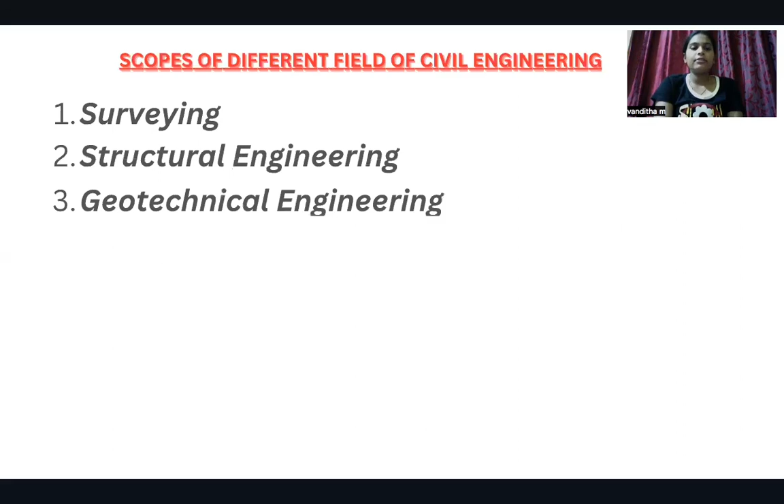So next, we'll discuss about scopes of different fields of civil engineering. Totally, there are 9 scopes of different fields of civil engineering, which include surveying, structural engineering, geotechnical engineering, hydraulics and water resources, transportation engineering, environmental engineering, construction planning and project management, earthquake engineering, remote sensing, and GIS.

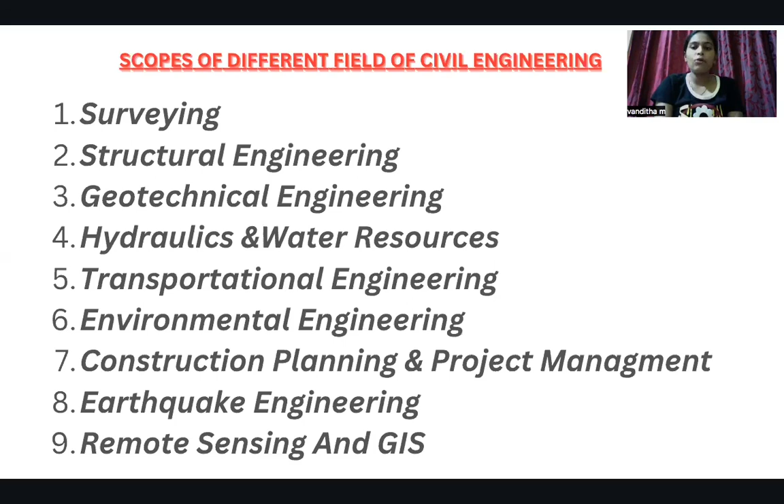So first, what is surveying? It is the science and art of map making. It mainly deals with various types of measurements and plotting of maps. Unless maps are drawn, no development work and construction can be undertaken. So surveying is a very important part in the construction of any structure. The common instruments used for surveying are chain, tape, compass, GPS, drones, etc.

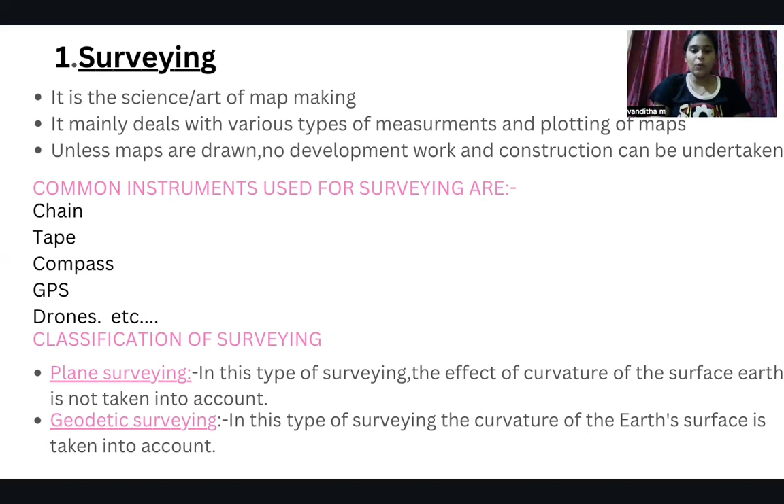The classification of surveying is mainly done into 2 types: the first is plane surveying, followed by geodetic surveying. In plane surveying, the effect of the curvature of the Earth's surface is not taken into account, whereas in geodetic surveying, the curvature of the Earth's surface is taken into account. So next, we have the instruments that are used for surveying.

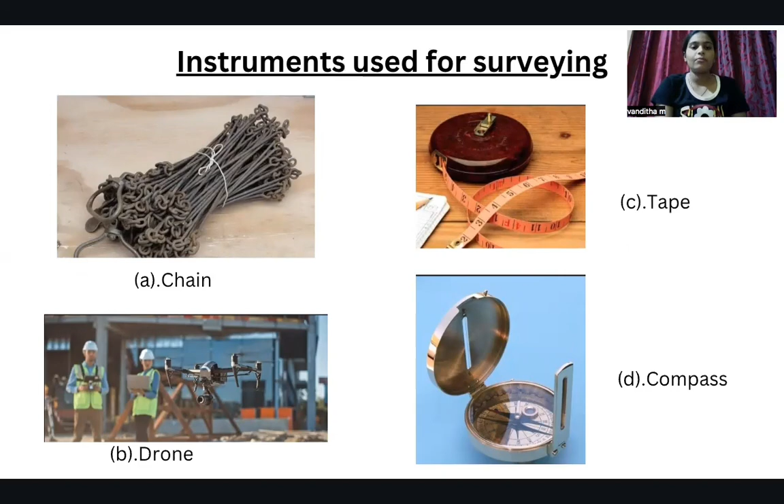Next, we'll move on to the building materials. What is a building material and what are the materials used for construction of a building? The materials used for construction of any structure are called building materials. As we all know, shelter is the basic need of every human being. In order to get a good shelter, the instruments or the type of materials used for construction need to be of a very good quality.

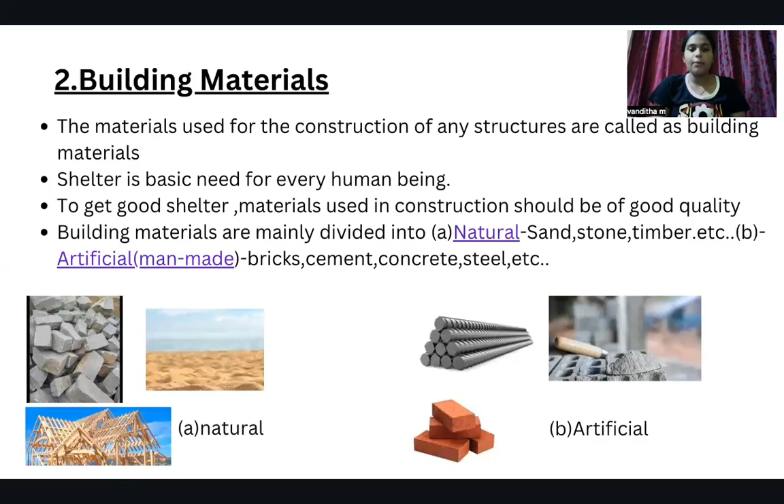The building materials are mainly divided into natural and artificial. Man made things come under the artificial type. The natural includes sand, stone, timber, etc. Whereas the man made, which is artificial, includes bricks, cement, concrete, steel, etc.

Next, we have geotechnical engineering. What is geotechnical engineering? It mainly deals with the study of soil, its types, and their properties. Soil properties may change from place to place, depth to depth, and even sometimes from season to season. Proper geotechnical engineering is essential for a safe and secure structure.

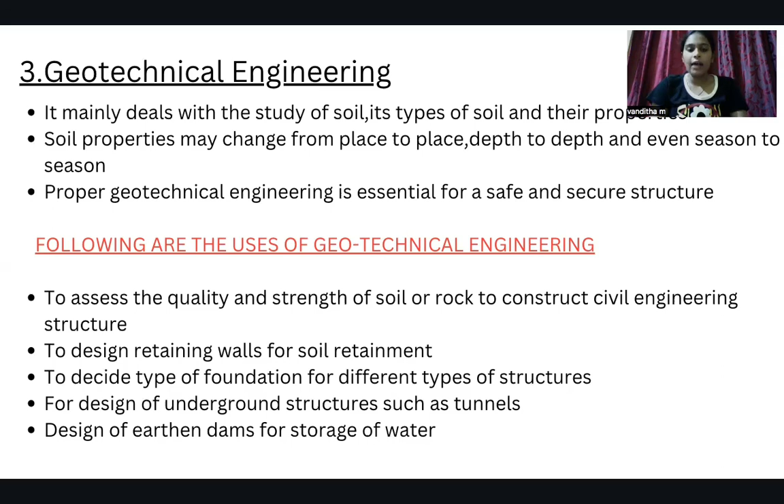The following are the uses of geotechnical engineering: to assess the quality and strength of soil or rock for construction of any civil engineering structure; to design retaining walls for soil retainment; to decide the type of foundation for different types of structures; for design of underground structures such as tunnels; to design earthen dams for storage of water.

Next, we have structural engineering. Structural engineering mainly deals with analysis and design of various structures such as steel structures and concrete structures. Steel structures include trusses in industrial buildings, towers, etc., whereas concrete structures include buildings, bridges, dams, etc.

What exactly is analysis? Analysis is determining the internal forces or stress developed in any structural components due to the applied load, for example beams, columns, etc. What exactly is design? Fixing or finding the suitable dimensions for structural components of any structure using various methods is called designing.

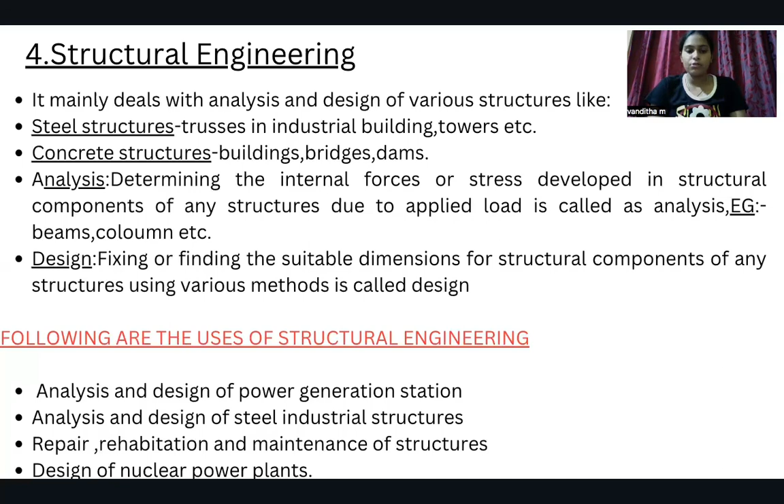The following are the uses of structural engineering: analysis and design of power generation stations, analysis and design of steel industrial structures, repair, rehabilitation, and maintenance of structures, and design of nuclear power plants.

What is project management? Planning for different construction equipment and machinery for construction projects. It deals with planning, scheduling, and execution of construction activities related to the project. It comprises men, material, time, and money management.

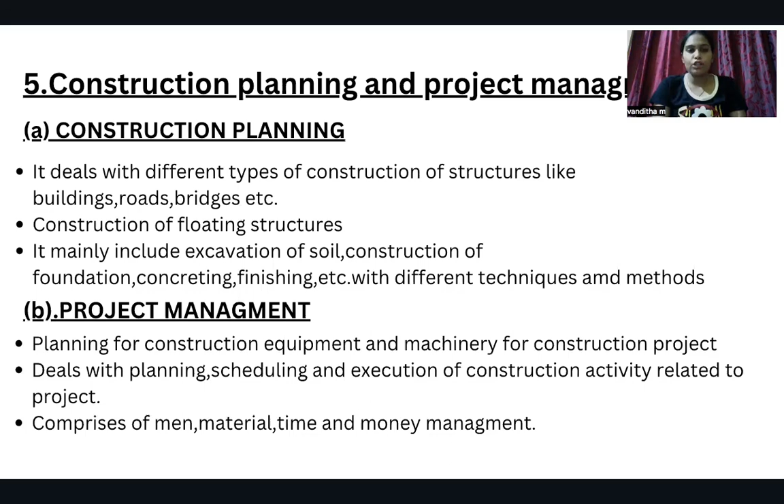Next, we have fluid mechanics, hydraulics, and water resources and irrigation engineering. What is hydraulics? As we all know, water is a very important need for all human beings. It mainly deals with the study of mechanics of water and its flow characteristics. Its applications include determining fluid properties such as density, vapor pressure, etc., and design of valves, pipes, gates, etc.

Water resources and irrigation engineering. What is water resource and irrigation engineering? It mainly deals with tapping or storage of water and supplying it to agricultural fields for drinking, domestic, or industrial purposes. It mainly includes identifying, planning, building, and retaining water structures such as dams and tanks, and carrying stored water to needy places—this is called water resource engineering.

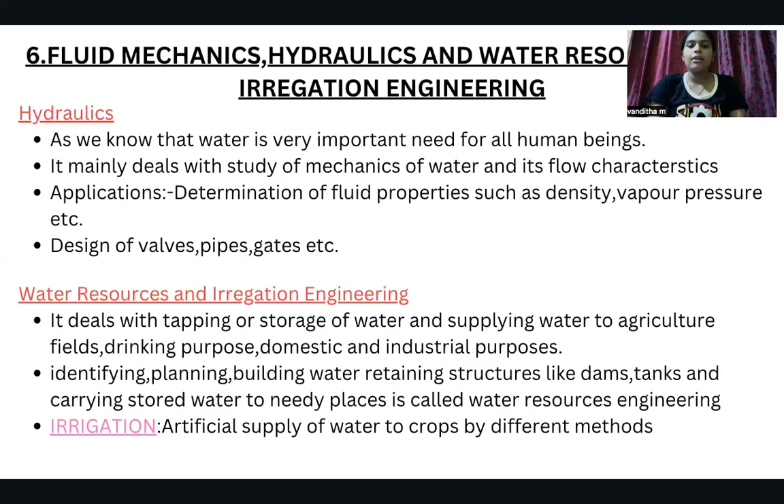What is irrigation? As we all know, the artificial means of supplying water to agricultural needs is called irrigation. So next, we have transportation engineering.

Transportation is a very important need for everyone in this generation. It plays a very important role in the economic development of the country. It mainly deals with the study of existing transportation systems and their improvement for safe driving. It also includes traffic management, including traffic signals, number of lanes, parking facilities, etc.

Now let's see the scope of transportation engineering. It involves planning, designing, construction, operation, and maintenance of transportation facilities. It contributes to economic, industrial, social, and cultural development of any country. Design of traffic signals for traffic control also comes under transportation engineering.

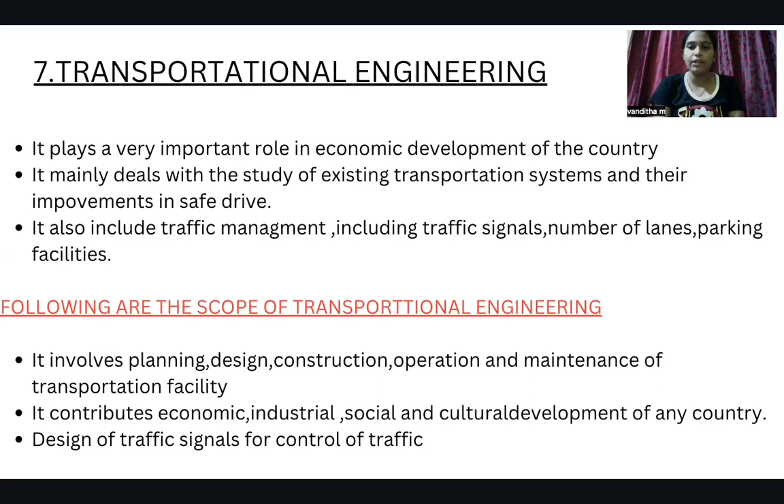Next, we have environmental engineering. What is environmental engineering, and what are its scopes? First of all, it is an important branch of civil engineering which covers both water supply and sanitary engineering. The importance of a clean environment was felt with the rapid growth in population, urbanization, and industries. The central and state governments have enacted laws for the protection of the environment needed for safe living of human beings, even though we are not able to get the required quantities we wanted.

The following are the scopes of environmental engineering: collection of water, purification, and supply for drinking; wastewater collection, treatment and disposal; air pollution control and treatment; and solid waste management and control.

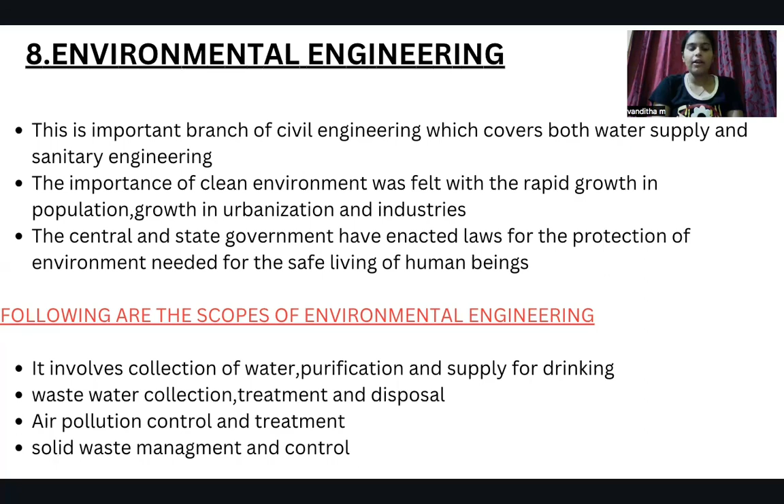Next, we have remote sensing and GIS. This is one of the new fields. The improvement in space technology and availability of GPS enhance the scope of geographic information systems. Good mapping techniques help to get required information accurately and quickly, to effectively manage and monitor available resources for optimal use. GIS is a high-tech equivalent of a map. It represents a means to locate ourselves in the world around us. It deals with the measurement, mapping, monitoring, and modeling of geographic information around us.

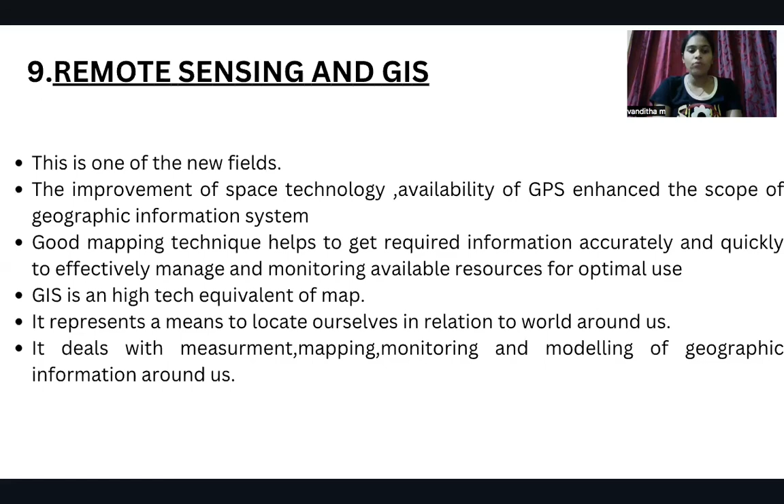So last is earthquake engineering. What is an earthquake? As we all know, an earthquake is a sudden and rapid shaking of the ground due to the passage of vibration beneath, caused by transient disturbance of elastic or gravitational equilibrium of rocks. The study of earthquakes is called seismology.

Earthquakes are measured using observation from seismometers. Seismic waves are recorded in instruments called seismographs. Earthquakes with a magnitude of about 2 or less are usually called micro-earthquakes, which are recorded on local seismographs, whereas earthquakes with magnitudes of 8 or higher are called great earthquakes.

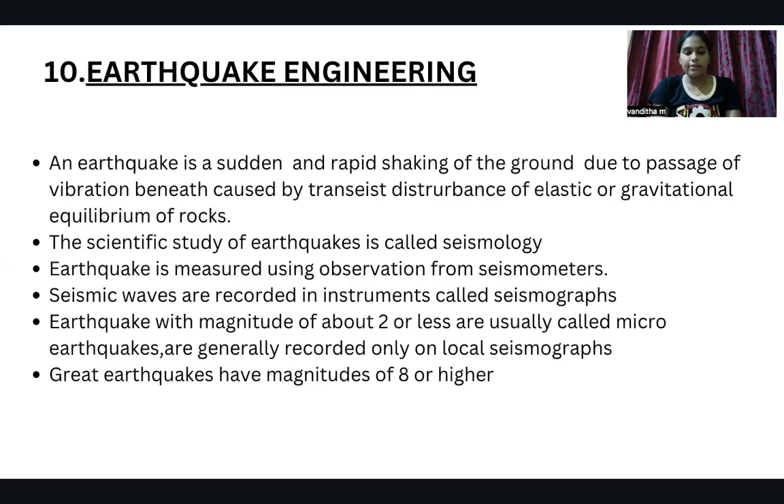So we have come to the end of the different scopes of civil engineering. Thanks for watching.